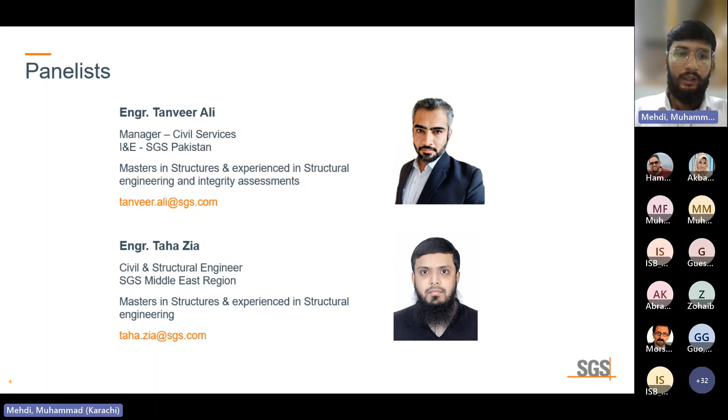In this session, I have the panelists: my senior and manager from civil services, Mr. Tanveer Ali, who is also a civil engineer with a master's in structures. Then we have Taha Zia, again a civil and structural engineer serving the Middle East team for SGS, and he also has a master's in structures.

This is the detail of the program. We'll give a basic introduction about SGS, then the asset integrity management system and its components. We'll discuss risk, risk management and its principles, the significance of risk-based inspection, and the criticality and potential risk for civil structures. We'll discuss the procedures involved in RBI, some examples of RBI inspections we have done, and inspection strategies related to RBI. Then we will have a question and answer session.

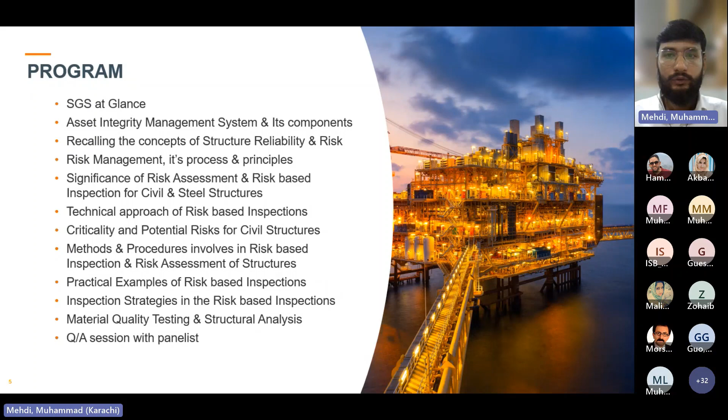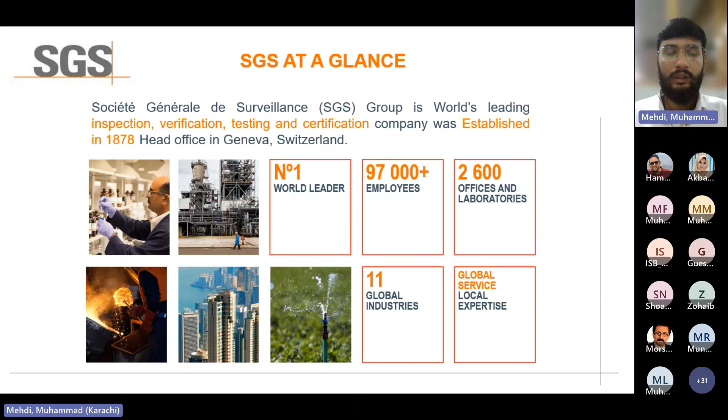Starting with SGS: it is a group and a world-leading inspection, verification, testing, and certification company, known as Société Générale de Surveillance. It was established in 1878 and currently serves more than 160 countries. On the timeline, SGS was founded in France in 1878. Then the business took off, and we opened new offices in France and different ports in 1879. In 1915, the headquarters moved from Paris to Geneva, Switzerland. In 1919, the name Société Générale de Surveillance was given.

In 1955, we started inspecting industrial machines and related goods services. In 1962, we established services for oil and gas, chemical sectors, mineral industries, and government institutions. In the 70s, we started providing environmental consultancy and remediation services. In 1981, we increased our presence in different areas, and our sales also increased. In 91, the booming economies in Asia fueled our growth, and we expanded our business to China as well. In 2000, our business grew further, our structure was enhanced, and SGS came to a leading position in the inspection business.

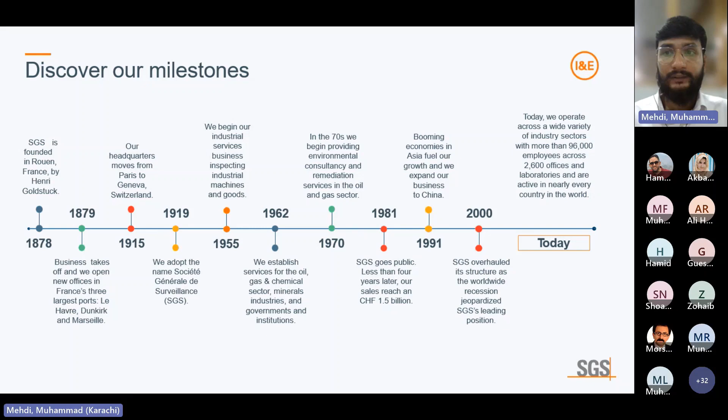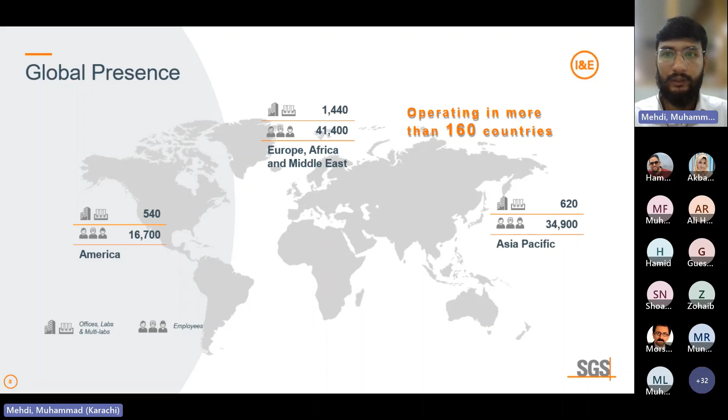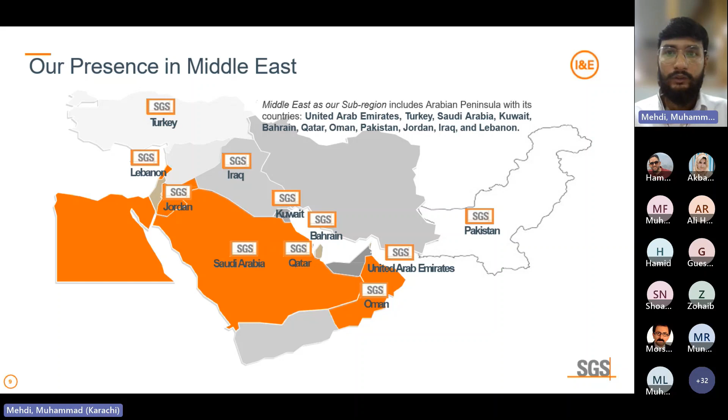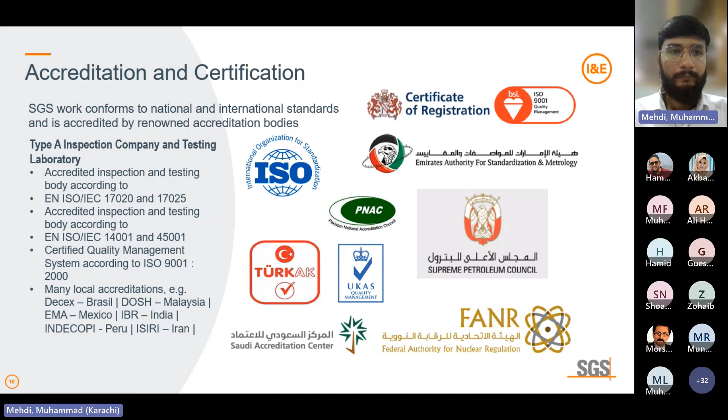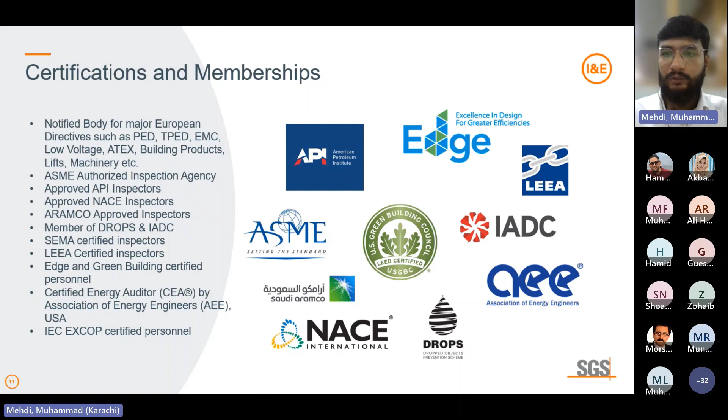Similarly, we have memberships and certifications, and we are approved inspectors for API and NACE. Also, we have approvals from Aramco, and we have certifications from the green building associations, things like these. So this was a brief introduction about SGS.

Now coming back to our topic, it is related to aging facilities and the risk-based inspection approach for civil and steel structures. So we will go step by step, and we will start from the bigger picture and then zoom into risk-based inspections. So we'll discuss first the asset integrity management system.

Asset integrity management system is basically a kind of program, and if we talk about it particularly for civil and steel structures, it is a framework which ensures the reliability of the structures, the safety of the structures, and the availability of the structures throughout the entire life cycle. It identifies and assesses the safety, environmental and financial risks which can be associated with the operation of the structure. It also establishes and maintains the suitable risk, and with the help of this program, we can further reduce the possible risk to our structures and assets.

The design we produce during our structural engineering and during the entire phase of engineering, it also assures that the design is fit for purpose, engineered to approved standards and in compliance with international standards. It reduces the risk to persons and the environment, as well as financial risk and the reputation of the company. So these are some of the risks, and with the help of this program, we can reduce them.

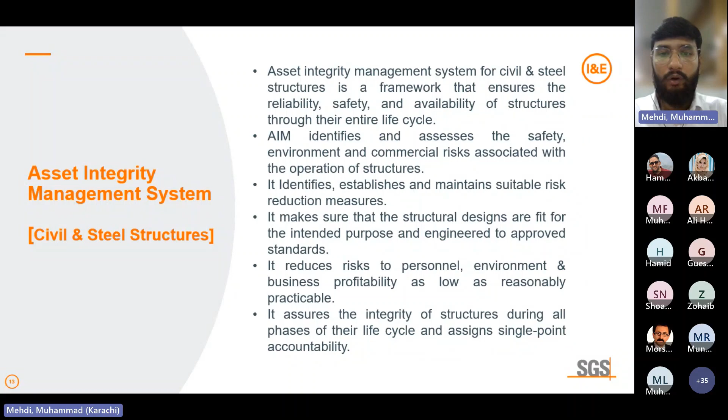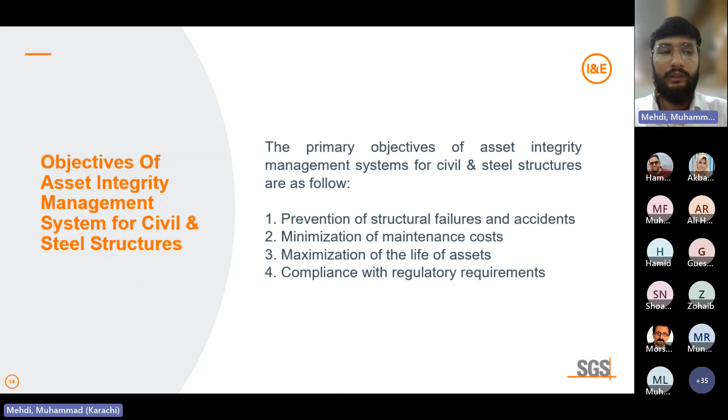It also assures the overall integrity of the structure during all the phases of their life cycle, and assigns the responsibilities to someone. So if we talk about the objective, it is to prevent the structure from failures and possible accidents. It can minimize the maintenance cost of the structures. With the help of an asset management system, if it is designed and developed efficiently, it can maximize the life of the asset, and it can also show compliance with the regulatory requirements, codes and standards.

So let's talk about the components of the asset integrity management system. They are five in number: first we have risk assessment, then we have inspection and maintenance, and documentation, then we have change management, and performance monitoring. We will discuss them one by one very briefly.

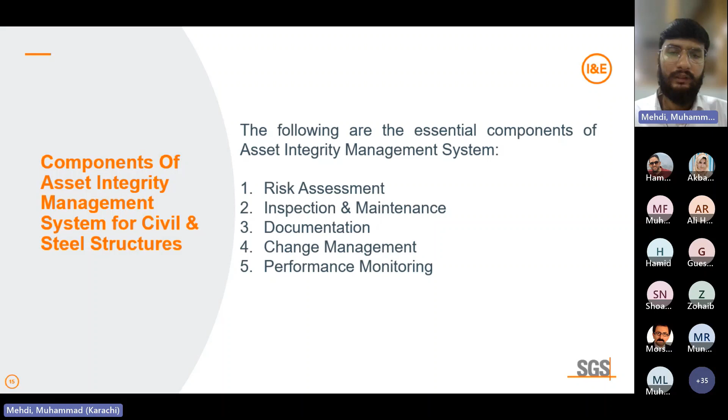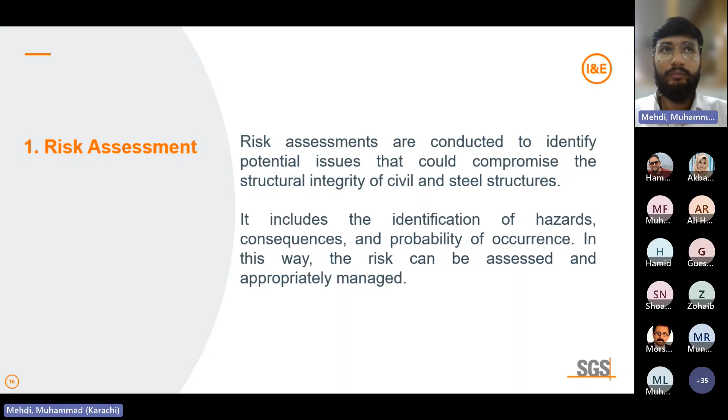Risk assessment is the kind of activity and phase which we conduct to identify the potential issues that could compromise the structural integrity of the civil and steel structures. It can be from various factors. It also includes the identification of potential hazards, the likelihoods of these hazards and the consequences. And in this way, the risk can be assessed, and if the risk is identified properly, we can manage it efficiently. So we perform the risk assessment to identify all these risks and then efficiently manage them.

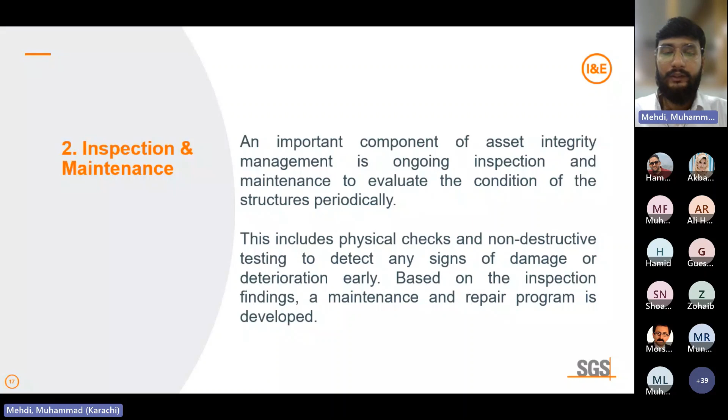The second component is inspection and maintenance, and it deals with the inspection of concrete structures and steel structures, which can be bridges, buildings, or oil and gas structures like foundations of the equipment. Once we perform the inspection, on the basis of that inspection and the observations, we develop strategies to maintain and repair the structure and to increase their life. The inspections include physical checks and non-destructive testing to detect any kind of damage and deterioration. And definitely we will develop the repair programs on the basis of these observations.

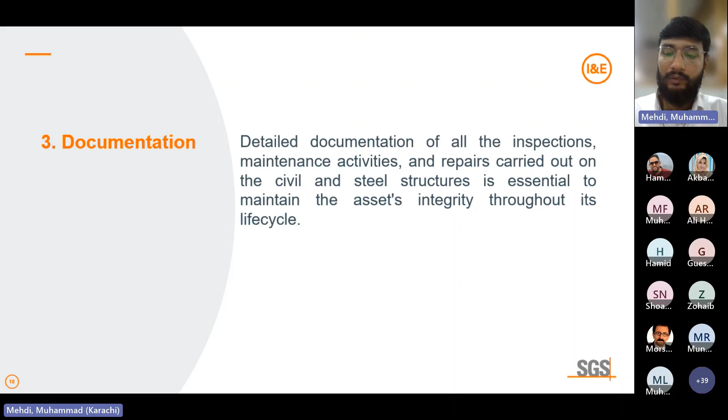So once we perform the inspections, we usually note down the observations we take during the inspections and maintenance activities, and then repair is carried out on the civil and steel structure in the areas of weakness, whatever damage the steel structure or concrete structure has. If it is possible to develop a kind of repair strategy which can enhance the life of the structure, we can develop certain types of repair strategies. And if it is not possible to further enhance the life of the material, then other options are to change the use of the structure or demolish it.

So this is the point I'm discussing, the fourth component, in which it is important to manage the changes to the structure, including modifications, refurbishments, reconstruction and demolition activities. These are all decisions taken on the basis of the last three components, which are inspections, risk assessments and documentation.

The purpose is that the changes do not compromise the asset integrity. For example, if a building is designed for a certain load, and solar panels are added on the roof, the building needs to be checked and assessed before the increment in the load. If it is not assessed and the integrity assessment of the structure is not performed, then there is a possible

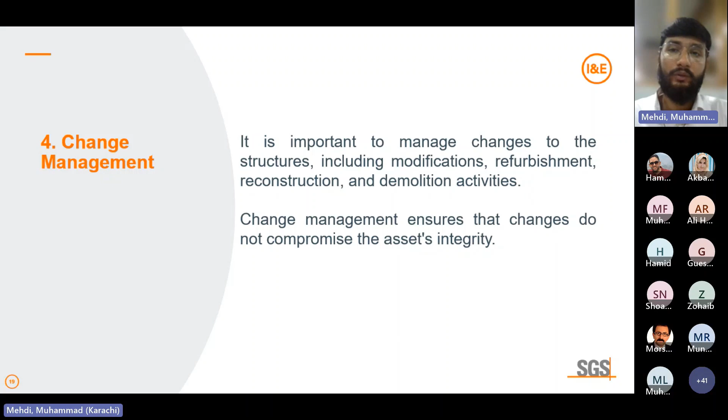This is the fifth component, which is to optimize the asset performance. It is critical to implement performance indicators and monitor the system. This component basically helps to provide data in the decision-making process and identify any trend that could lead to failure. So in this stage, we develop certain types of indicators which help us to assess the condition of our asset, which in our case is civil and steel structure.

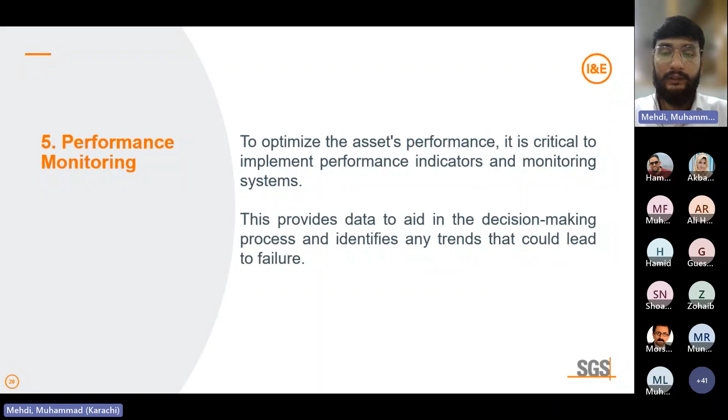So if there is a trend in which the damages are developing and cracks are emerging, then we can note it down, and our inspectors, on the basis of their periodic inspections, can share the document which helps us, or the owners, to take the decision for the

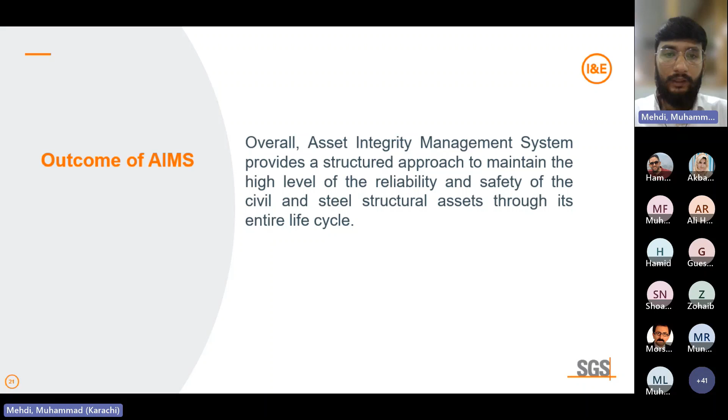changes. So overall, the asset integrity management system provides a structured approach to maintain a high level of reliability and safety of the civil and steel structure assets over its entire life cycle, and this is the goal of the overall asset integrity management system.

So before moving towards the detailed discussion on risk assessment, I just want to recall the concept of reliability, which is about applying engineering theories to buildings and more generally structural analysis. Reliability is also used as a probabilistic measure of structural safety. The reliability of the structure can be defined as the complement of the probability of failure.

So we have the probability of failure, which is dependent on the different types of failure modes and potential failures, which can be structural redundancies, a design problem, construction errors, the number of inspections done, or natural disasters

or fireworks, things like these. So whatever the potential failure, we can develop equations and on that basis calculate the probability of failure, and the reliability can be calculated as the complement of the failure. Failure usually occurs when the stress exceeds the strength. So reliability is measured by comparing a component's stress to its strength. The larger the gap between stress and strength, the greater the reliability and the safer the structure.

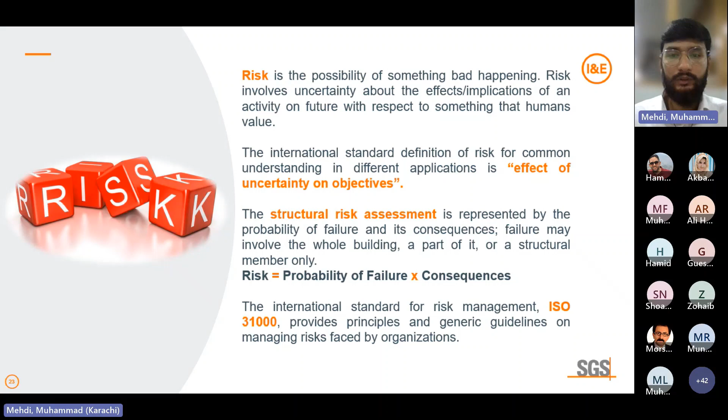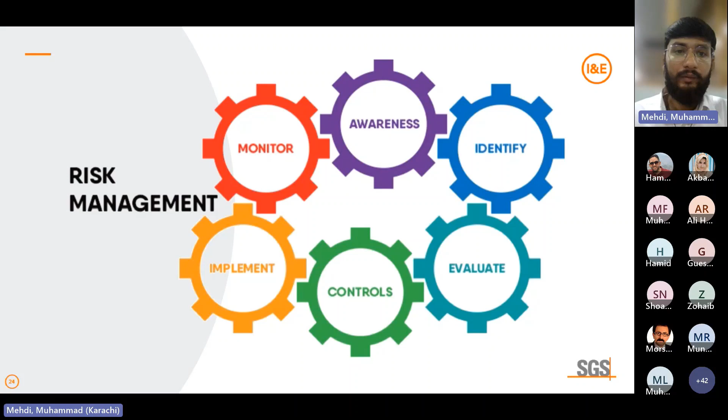The standard we use for risk management is ISO 31000, which provides the principles and guidelines. Risk management has different parameters and components in which we identify, evaluate, and control. We create awareness, we monitor, and then implement them.

So if we talk about risk management, it is the process of identifying, assessing and controlling the threats to any organization, the threats to any asset, for example, machines like equipment, electrical assets, mechanical assets, and in the civil category, the threat to any structure.

These risks stem from a variety of sources, including financial uncertainties, legal liabilities, technology issues, strategic management errors, and can be due to accidents and natural disasters. We will discuss them in detail in the upcoming slides. And these risks can affect the people, the finance, the environment, and the reputation of the organization.

The process involved in risk management has planning, identification, quantitative and qualitative analysis, response planning, monitoring, and control of the risk. As I discussed, the objective of risk management is to increase the probability and impact of positive events and decrease the probability and impact of negative events in the overall asset life cycle.

So in case of civil and steel structures, if we want to reduce, minimize and manage the risk, then our target is to improve the condition of the civil structures or steel structures by proper maintenance. And if this is done properly and from time to time on the basis of proactive maintenance, the structure can improve its life.

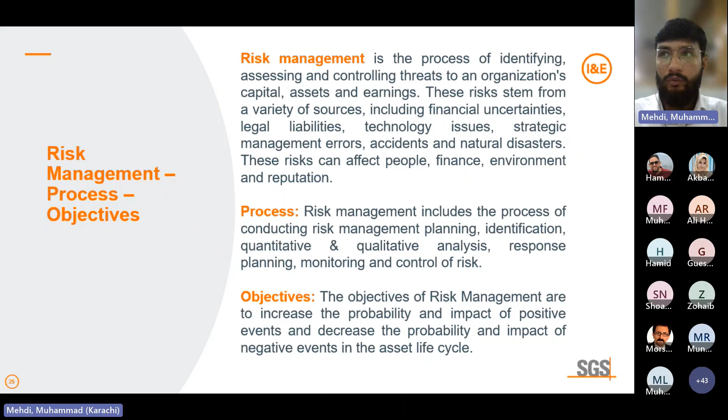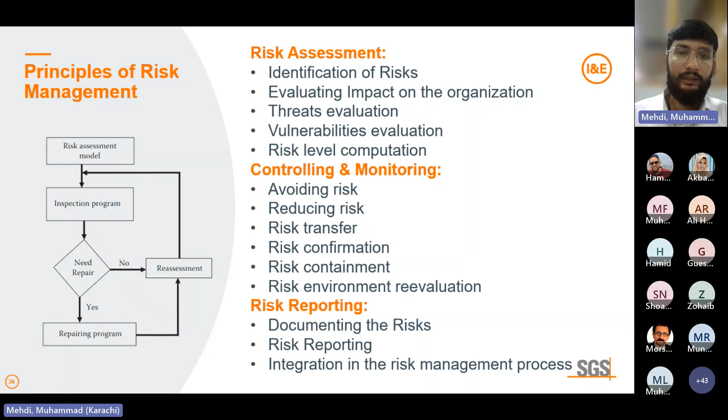So till now, whatever we have discussed is a kind of basis, in which I have recalled the concepts related to risk, reliability, the risk management program, and overall, in a big picture, the asset integrity management system. Now we are going to talk about the risk-based inspection approach for civil and steel structures.

So RBI, in short, is a systematic approach which is used to assess the likelihood and consequences of equipment or structural failure. If applied, we can manage the risk associated with civil and steel structures, and it involves a combination of statistical analysis and structural engineering expertise, including structural analysis. It involves understanding the mechanical and chemical properties of the material, and it also involves site-specific factors related to the construction.

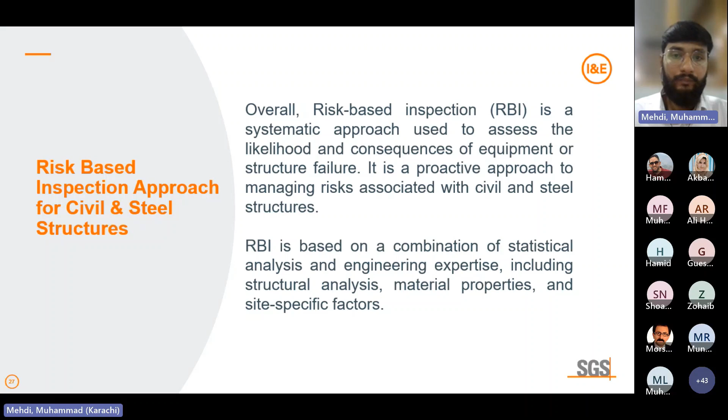So in case of civil and steel structures, RBI can be used to identify potential vulnerabilities which can be due to inadequate structural design, for example, the load taken for the design may not be suitable, and the building is designed for less load. Another factor is the environmental factor, and the third one is construction issues.

So these are some potential vulnerabilities, and with the help of RBI, we can identify the problems related to material degradation, cracks emerging in concrete structures and steel members due to extra loading or some kind of unplanned loads, and corrosion and fatigue in these structures.

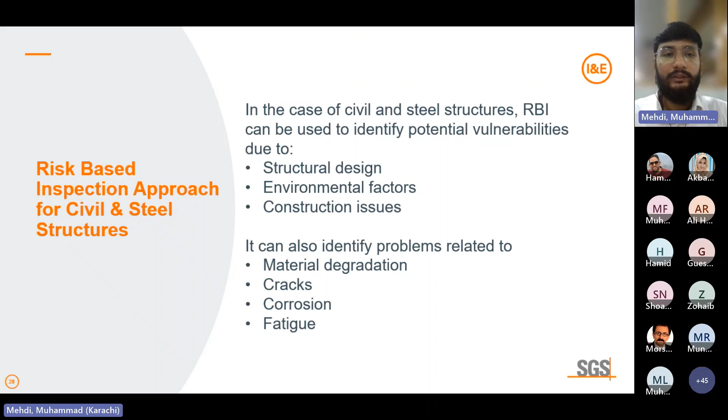And similarly, for example, the flood conditions, like in Pakistan last year, the rainfall was very high, due to which flood conditions developed in various regions. So it affects the substructure of the building, and if it is not properly addressed, we can lose the lives of people. We can have financial losses. We may have environmental issues, and also it affects the reputation of the organizations who are designing the buildings, who are

constructing the buildings. And in fact, if we talk about the industrial sector, for example, if you have a tank and it has a ring wall in the bottom, if the ring wall is not designed adequately to cater the load of the tank, if it is not properly monitored and maintained, then the degradation, the deterioration of the structure, and if corrosion emerges, it can affect the integrity of the structure, and ultimately it can cause a serious problem for the integrity of the tanks. And settlement issues arise, due to which there may be leakages of the oil, which can contaminate the soil at the bottom and will affect the environment.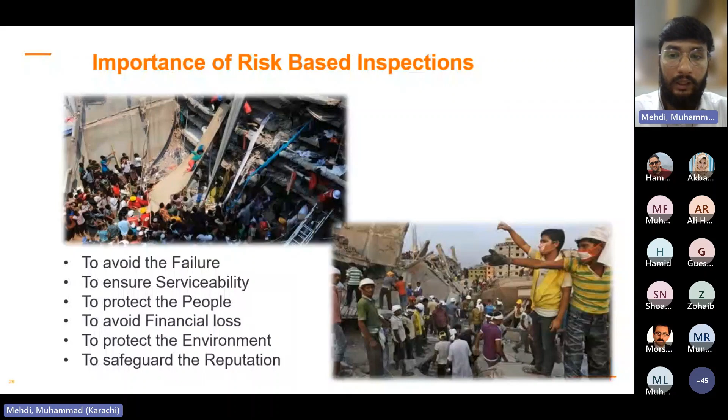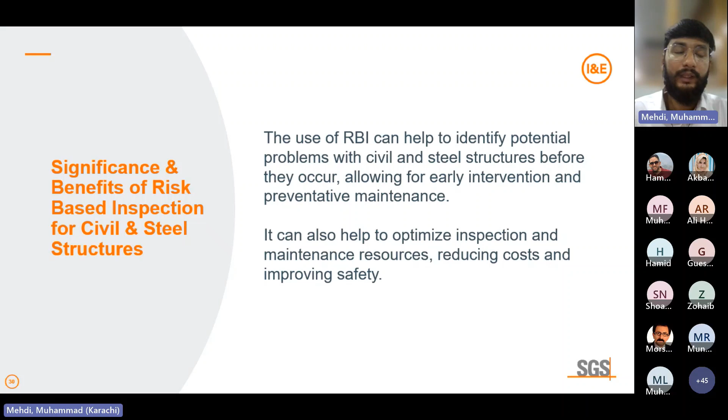So these are some of the issues, and this is the importance of the risk-based inspection, that if you perform the inspections timely, then we can protect many lives and assets. So the target is to identify the potential problems before they occur, allowing for early interventions, and we can develop a program for the prevention of these kinds of risks and threats. It can also help to optimize the inspection and maintenance resources, which will ultimately reduce the cost and improve the safety of the assets.

So if we relate the risk-based inspection approach to the maintenance plan, we have different techniques which can be used to define the inspection and maintenance plan for onshore and offshore structures. For example, with RBI, if we understand the whole structure and we know the whole lifetime of the structure, it is easy to predict the future requirements in the maintenance. Similarly, maintenance of existing old buildings and its relation with the cost of repair need to be considered during the maintenance plans, and the lifetime of the maintenance or the protection of the structure must be taken into consideration. So the required time to perform the maintenance must be discussed thoroughly.

We can say that to maintain existing old buildings and restore the structure to its original strength, the repair method of rehabilitation is also governed by the initial cost of the repair, the number of times the maintenance will be performed, and its cost over the remaining life of the structure. Usually, the lifetime of the maintenance or the protection of the structure must be taken into consideration. So the required time to perform the maintenance must be discussed thoroughly. And the first step usually is to calculate this particular time, when maintenance needs to be performed.

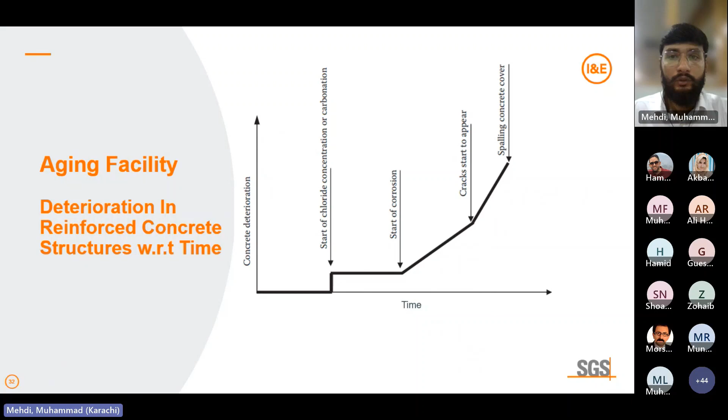Similarly, if you talk about the reinforcement, usually without corrosion, the rebars have minimum nominal diameter. But when corrosion starts and the degradation process begins, then material degradation due to moisture or oxidation causes the material to disintegrate, resulting in capacity loss in the reinforced concrete sections.

If we talk about the fundamentals of design of any reinforced concrete member, the member's capacity is dependent on the cross-sectional dimensions of the concrete and steel area, and the material strength, concrete strength, and steel yielding strength.

In the case of uniform corrosion, as you can see in these figures, the total longitudinal reinforcement area can be expressed as a function of time, where T is the time, D is the diameter of the bar, N is the number of bars, Ti is the time corrosion initiated, and Cr is the rate of corrosion. Equation 11.2, as mentioned here, takes into account the uniform corrosion propagation process from all sides.

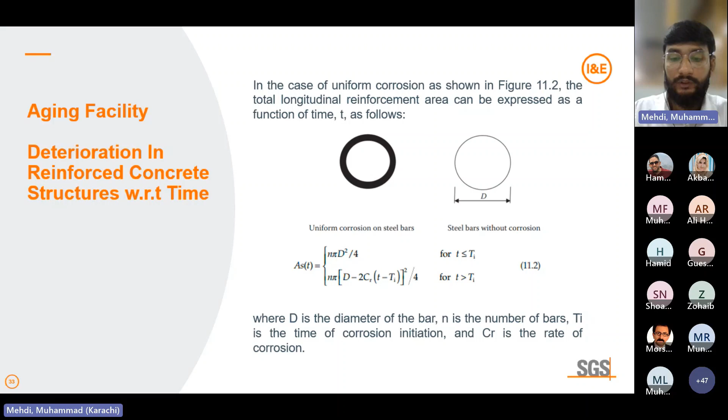Overall, over time, the collapse of the structure is more likely with the increase in the rate of corrosion. In these curves, you can see we highlighted the pattern of deterioration of the steel reinforcement.

In these two slides, slide 34 and slide 35, this slide particularly shows the reinforcement ratio—at the bottom we have 1% ratio. We are talking about this particular structural element, the column. In the column, we have a range from 1% to 8%, but usually it is taken from 1% to 4%. If there is a lower reinforcement ratio, which is 1%, the reliability versus time graph shows different corrosion rates.

For example, the minimum rate is 0.064 millimeter per year, and the maximum is 0.114 millimeter per year. In this graph, from 0 to 10 years, the pattern shows a reliability value of 4 to 5, then from 10 to 20 years it reduces, and from 20 to 50 years it's moving constantly.

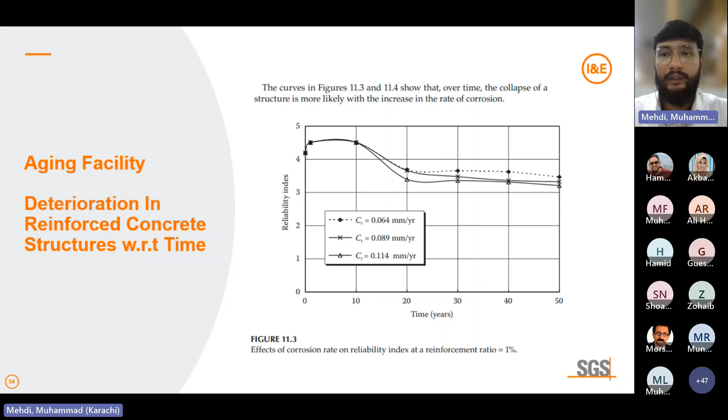But in the next slide, if the reinforcement ratio is increased to 4%, then from 0 to 10 years, the value of reliability is again more than 4, in fact more than 5, meaning the reliability is improved. But when it moves from 10 to 20 years, it reduces, and after 20 to 50 years it reduces gradually, and it is not a constant curve.

In these cases we understand that in case of higher steel ratios and lower corrosion rates, this period may increase to about 15 to 20 years. Moreover, this study expects that in case of columns with eccentricity, the moments on the column will increase, so the design should increase the percentage of steel. In such cases, it is expected that the deterioration of a structure towards criticality will occur after a couple of years in cases of lower reinforcement steel ratio and very high corrosion rate.

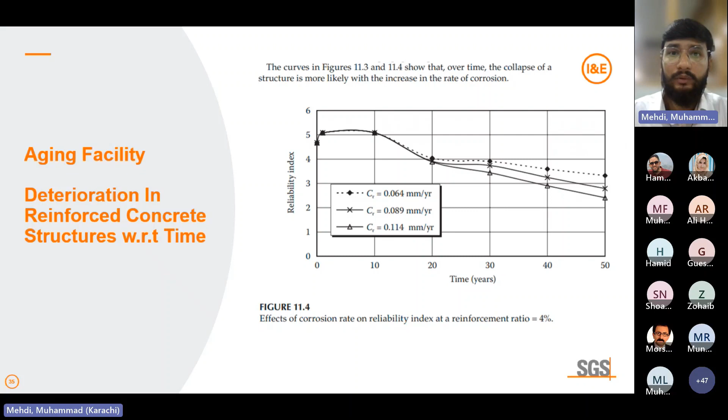On the other hand, as in this graph, in the case of higher reinforcement ratio and lower corrosion rate, maintenance will be due somewhere around after 5 to 10 years. So this is what we wanted to explain, that over time the collapse of a structure is more likely with the increase in the rate of corrosion. These need to be considered when highlighting the risk.

So in this section, we can see this is a calculation for the time which is required for the corrosion. In the case of structures exposed to chloride, the time required for spread of chloride in the concrete until it reaches the steel is the time required for the corrosion.

It is also important to consider that in the case of structure exposed to carbonation spread inside the concrete cover, several equations can be used to calculate the time required for this.

To calculate the depth of carbonation, the equation D equals A into T power negative 0.5 can be used, where A is a fixed amount depending on the permeability of the concrete as well as the quantity of carbon dioxide in the atmosphere, and there are several other factors.

Similarly, in the second equation, we have water cement ratio W upon C, where S is the effect of the cement type, and capital W is the weather effect.

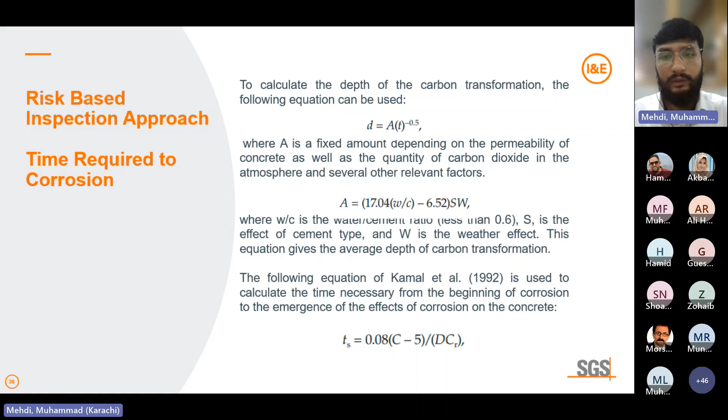If you want to reduce the cost of deterioration, or in other words, optimize the life cycle cost of the structure, a balance needs to be achieved between the benefit of risk reduction by improving designs and maintenance, including inspections, and the cost associated with these measures. If we talk about the failures and the risk cost...

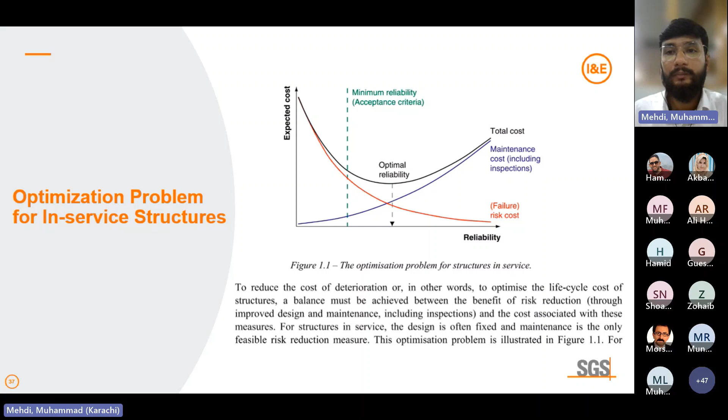Now we're going to talk about the process of risk-based inspection for civil and steel structures.

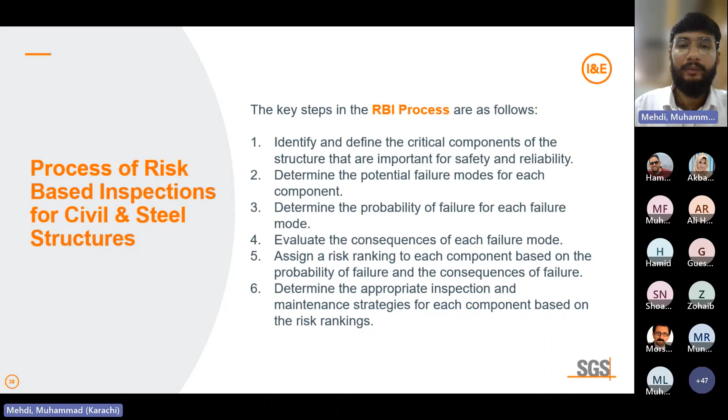It involves identifying and defining the critical components of the structure that are important for safety and reliability. Second, determine the potential failure mode for each component. Third, determine the probability of failure for each failure mode, and then evaluate the consequences of each failure mode. Fifth, assign a risk ranking to each component based on the probability of failure and the consequences. Sixth, determine the appropriate inspection and maintenance strategy for each component based on the risk ranking.

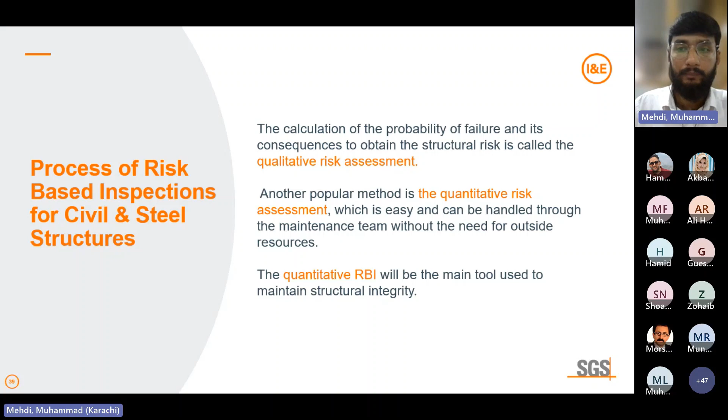So we quickly move on. The calculation of the probability of failure and its consequences to obtain the structural risk is usually called qualitative risk assessment, but we can also perform a quantitative risk assessment in which we calculate numbers, and on the basis of these numbers we can develop risk matrices.

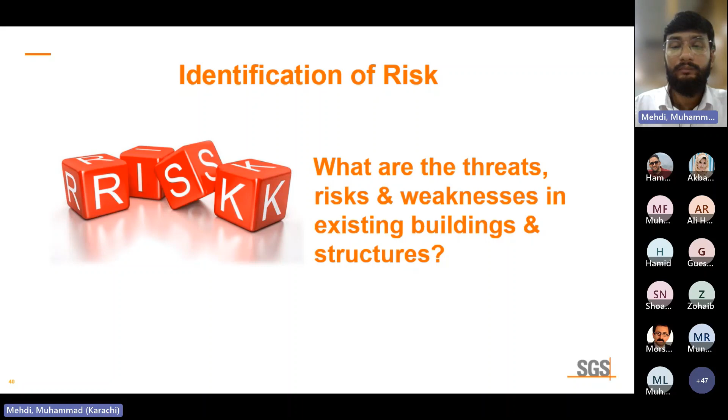So one by one we will discuss these processes involved. In the identification of the risk, we need to identify what are the risk threats and weaknesses in the existing building structures. From design to execution, you need to think and plan.

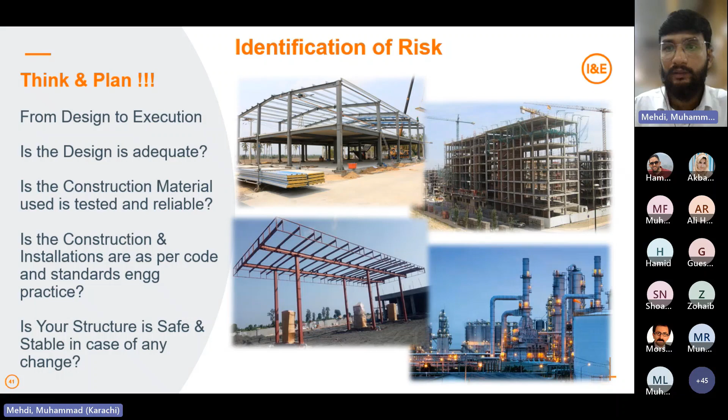Is the design adequate, is the construction material used tested and reliable, are the construction installations as per code and standard engineering practices, is the structure safe and stable in case of any changes. These are some pictures related to pre-engineered buildings, civil concrete structures, high-rise buildings, industrial plants, and fuel utility stations.

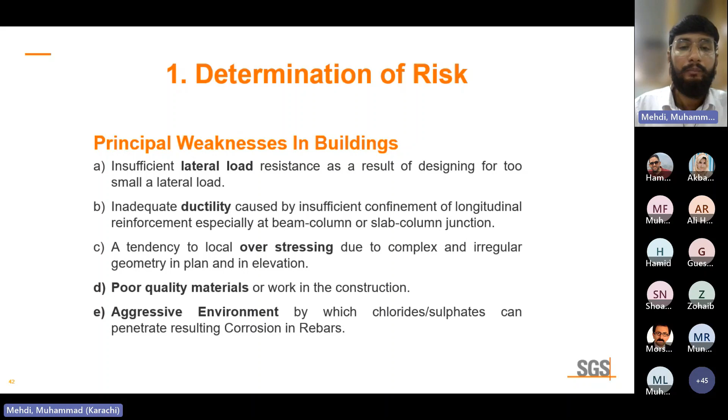It can be a tendency to local overstressing due to complex and irregular geometry in plans and elevations, poor quality material in the construction work, and one factor is aggressive environment due to chlorides and sulfates penetrating and resulting in corrosion of the rebar.

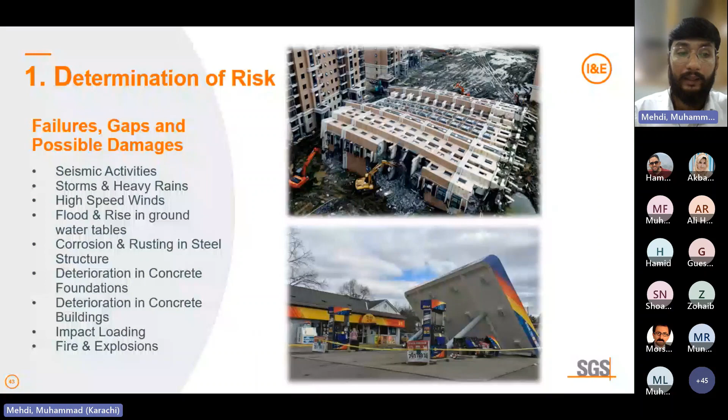You can see the collapse of these buildings and fuel retail stations. This happens because if buildings are not designed adequately or not constructed properly, they can be affected by the impact of loads, seismic activities, effect of storms and heavy rains, high speed winds, flood and rise in groundwater table, corrosion and rusting in steel structures, deterioration in concrete foundations, deterioration in the building, and impact loading when heavy force in a short span of time affects the structure.

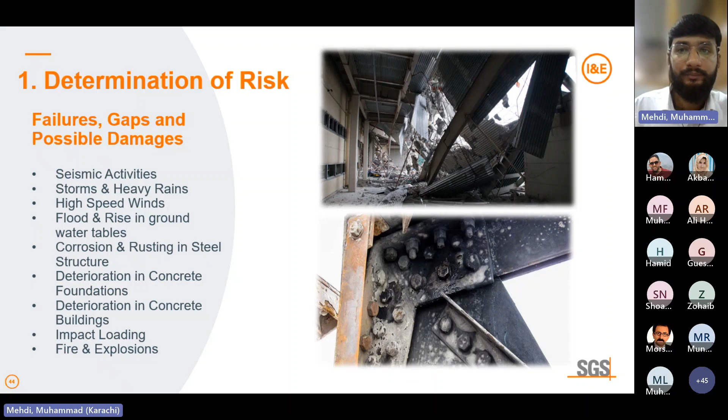It can collapse the structure, and fire and explosions in the industrial sector is very common. You can see the impact of fire in steel structures as well when structures are not properly constructed. Fireproofing can perform here to minimize the risk of fire, but as you see, it was not done, so that's the impact of the burning, and the effect of load, impact load, as well as the effect of wind loads can be very common in steel structures if they are not designed adequately.

Similarly, the effect of earthquakes and seismic activities for the oil and gas sectors, especially for offshore structures, the structures under the sea, is very important to be monitored periodically to avoid corrosion, the start of corrosion, and the CP system to control corrosion needs to be monitored especially.

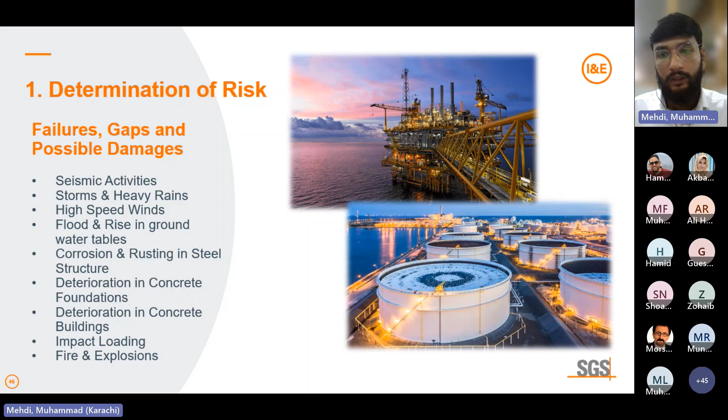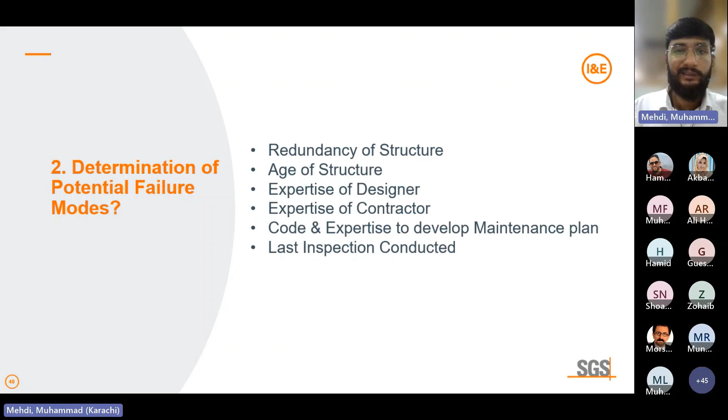Second is determination of the potential failure modes. It can be redundancy of the structure, age of the structure, expertise of the designer, expertise of the contractor, code and expertise to develop a maintenance plan, and the last inspection conducted. These are some potential failure modes which can be considered to determine the probability of failure.

Determination of the probability or likelihood of the failure modes can be calculated by these tables. You can see that whenever a structure is constructed, after 10 years there is a probability of failure of 9%. After 20 years, it increases to 25%. And with the passage of time, after 50 years, there is a 91% probability of failure because the material usually degrades.

And if the maintenance is not properly managed, then there is the chance of failure in the structure. In the second table, you can see the different failure modes, and there are some ranges in which you can quantify them, the level of the risk associated with them. When you quantify them on the basis of expertise and engineering judgments, these S1 to S6 are different kinds of structure taken as an example, and the factors for the structure's probability of failure are assigned accordingly, and then the total score is calculated structure-wise.

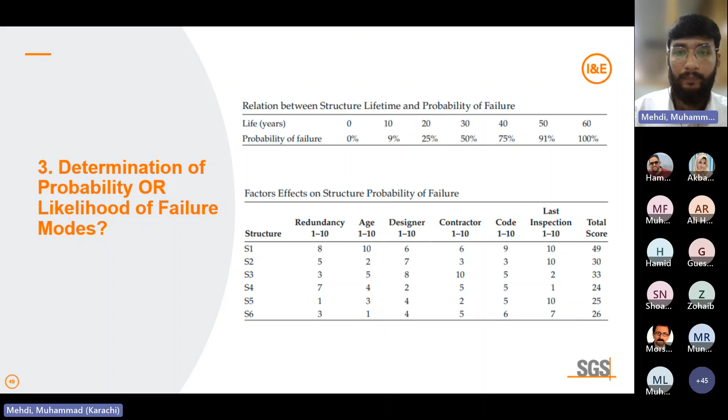Then, in order to calculate the consequence of failure, six different structures are taken as an example. The impact on the person, impact on the cost, impact on the environment, and impact on the reputation. These are again numbered in ranges from 1 to 10, and these are assigned as per expertise: what the consequences are, how much the person will be affected, how much cost it will be when this particular structure is damaged.

For example, if the ring wall foundation of the tank is damaged, it will definitely affect the whole tank full of crude oil or other material. Similarly, if the foundation of a high-rise building is affected, or if the pile of the offshore structure is affected, then it will definitely cause harm. But, for example, if the cantilever slab of any projection is affected, then it will have less impact on the environment, or minimum cost will be taken to reconstruct it. So these are some factors which are considered during the calculation of the consequences.

Then we have an evaluation of the risk ranking based on the probability and consequences. Again, remember that when you are calculating the risk, it is the product of the probability and consequences. So for all the structures, the probability of failure was calculated from the last table, and the consequences are calculated from this table, and they are placed here in two different columns. Then by the product of the probability of failure and consequences, we get the risk number. These numbers are very important because on the basis of them, we can categorize them priority-wise.

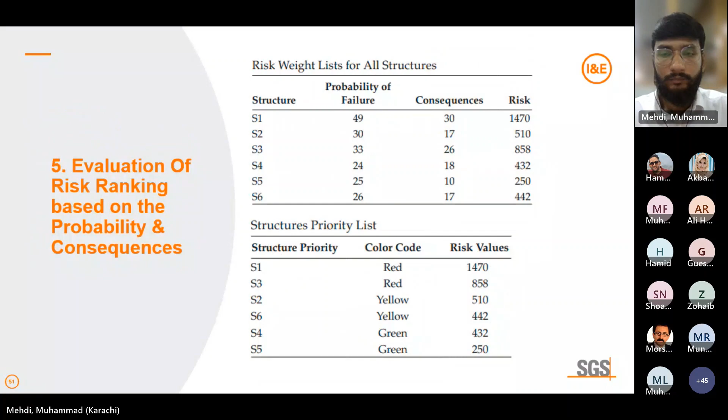And priority means we can give high importance to that particular structure which is in the red category, then the yellow category, and least importance is given to the green category. Step by step, you perform the maintenance, and repair strategies are developed accordingly. So you can see here, this is a kind of example. Okay.

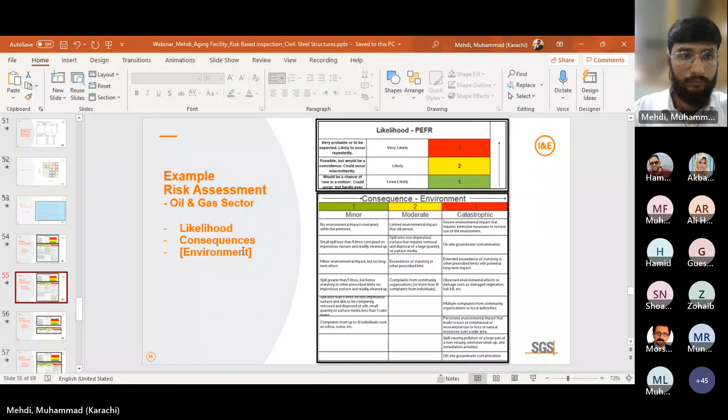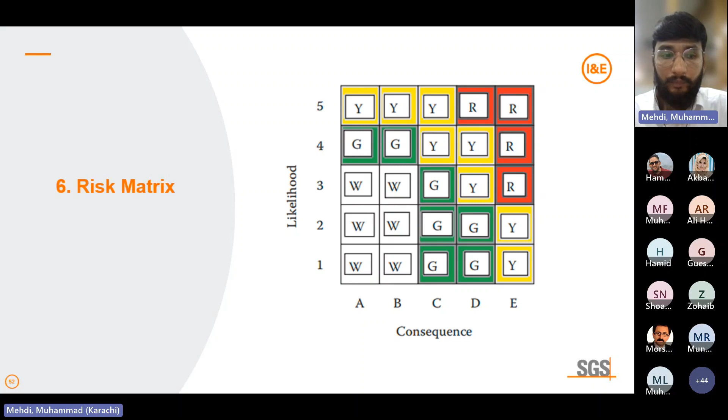So after these calculations, you can develop a kind of risk matrix in which on the bottom you have consequences, and on the vertical axis you have likelihood or probability of failure. So you will then categorize them and can also assign them a particular color on the basis of the priority. So I'm sharing one example here from the oil and gas sector, in which

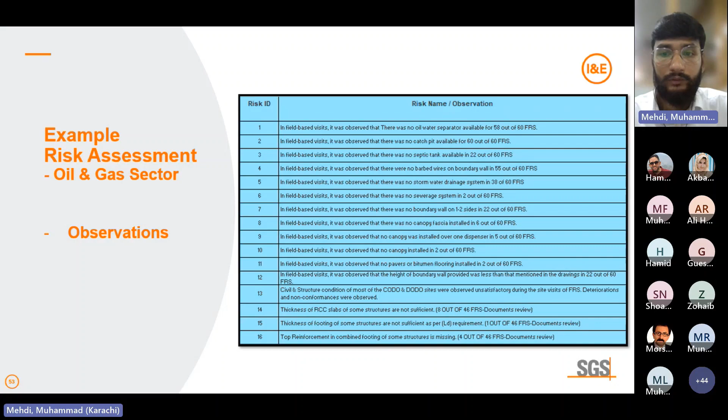we have taken some observations for the fuel retail stations, and you can see that there are a number of observations related to the unavailability of, for example, the oily water separator, the unavailability of the catch pits, boundary wall is not available in some cases, canopy structure was not available, and similarly, the thickness of the RC slab of the structure was not sufficient. So after these observations, each observation was considered, the likelihood was assigned, and the consequences were also assigned.

So the likelihood deals with how likely this can happen. If it can happen repeatedly, then we assign a 3. Similarly, if there is a possibility to occur intermittently, then it is a 2 with the yellow color, and if it is less likely, then it is a 1.

The consequences on the people, you can see here, there were 3 different columns. Minor consequences are when people are affected and there is a requirement of first aid, not affecting work performance and not affecting the daily life activity of a person, and illness with reversible health effects such as food poisoning and dermatitis. So these are some guidelines: if people are affected in this category, then it is minor and a consequence of one is taken.

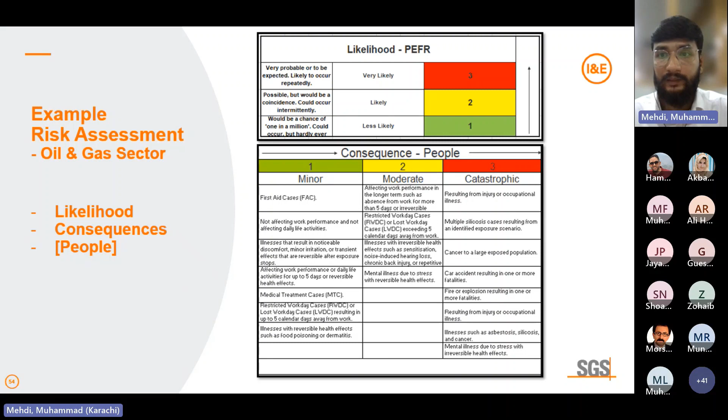Otherwise, if it affects the performance in the longer term, such as absence from work for 5 days, for example, then it is considered moderate. And if it is resulting in injury or occupational illness, or a kind of car accident, or multiple, you can say, for example, cancer to a large exposed population, these are some factors which are considered a catastrophe for the impact on the people.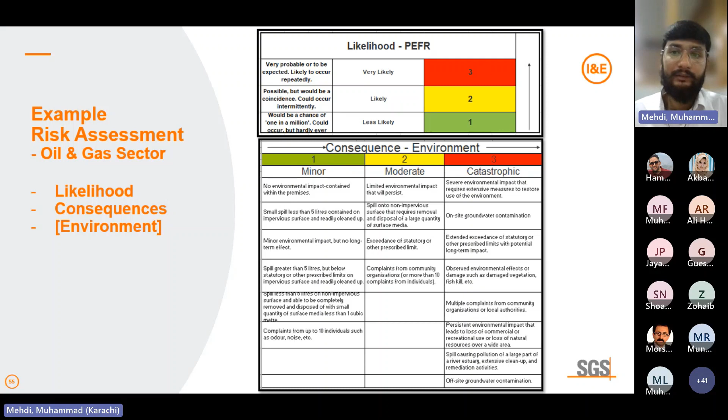In the third consequence, we have finance. For example, a cost up to 100,000 USD can be taken as minor, moderate in between 100,000 to 1 million USD, and a cost exceeding 1 million USD is taken as catastrophic. This is the impact on the finance. It means if your structure is damaged, if your building is damaged, what will be the effect on the finance of the organization? And it is not only limited to the cost of the asset, particularly.

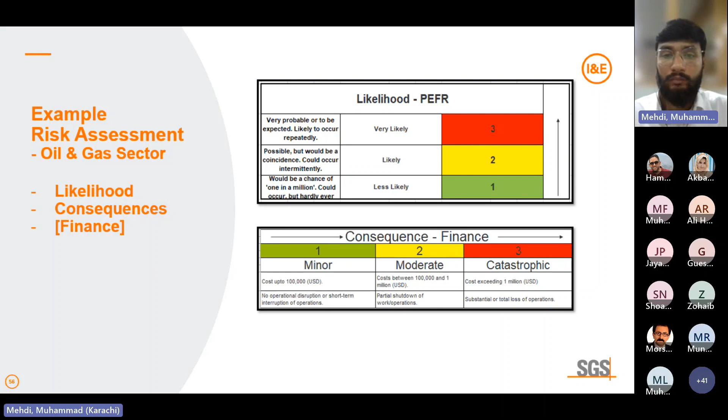For example, you can see if the operation is disrupted, if there is total loss of operation, then it will be considered a catastrophe. But if the operation can be resumed after some days or a short time, then it can be taken as minor. The last is the reputation of the organization.

If the damage of the asset is negligible to notable on local level, no local media coverage, no public awareness or concern, then it can be taken as minor. But if there is extensive coverage in national and international media, for example, there are casualties of people, or there was extensive damage to the infrastructure, then it can be taken as catastrophic, because it will affect the reputation of the organization, or maybe it can cancel the license of the organization if the damage is so high.

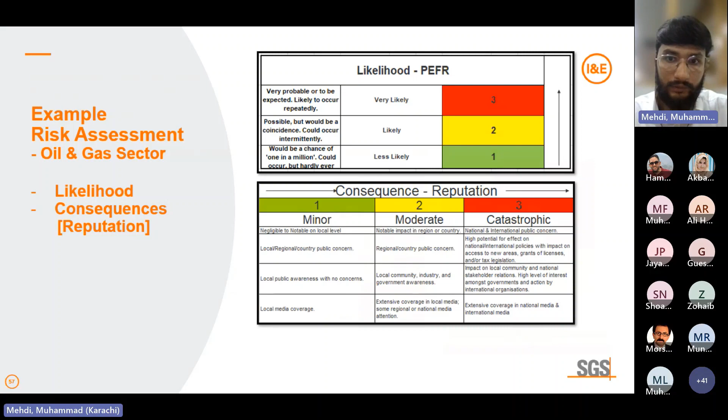So these are the kinds of consequences. On the basis of the last 3 to 4 slides, this is the outcome. On the left side you can see the observations, then there is a likelihood column, then we have consequences on the people, environment, finance, and reputation. And there is a risk score, which shows the color of the risk and also a number giving the priority. For example, red color shows that priority is given to these particular observations on an immediate basis, and the repair and maintenance strategies should be developed.

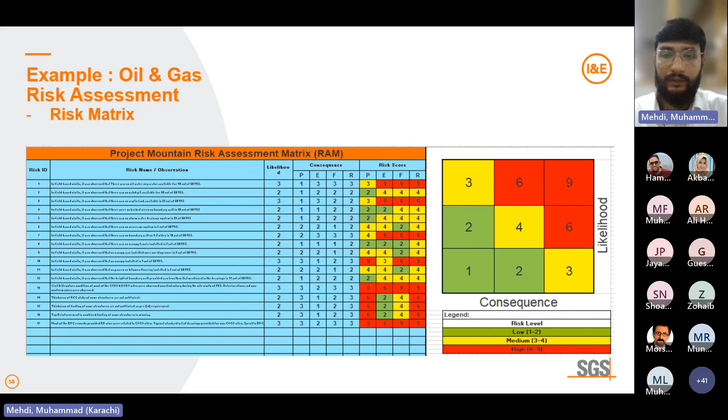So after this risk matrix, we have 3 to 4 slides remaining, in which we will be discussing the inspection and maintenance strategies. The decision-making methods of an engineering project have been the focus of numerous studies in terms of their economic and financial importance to the cost of the project, because any wrong decision or false assumption could result in spending a huge amount of money to reverse the consequence and effect of this damage.

So some studies have used decision trees to determine the appropriate time for repair, particularly in the case of infrastructure bridges, which required periodic inspections. When performing the maintenance plan strategy based on cost, we must consider all the factors affecting corrosion in general, and other factors affecting structural durability and reliability. For example, any method upon which a decision is based should define the time for regular maintenance and inspection, such as 10 years, 15 years, or 20 years.

This decision is made first and foremost through the identification of the least expensive option. So this is the main way forward, that the decision is made first and foremost through the identification of the least expensive option.

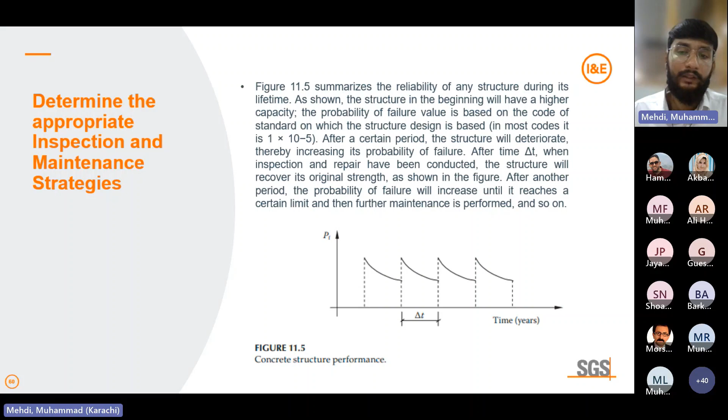So if periodic maintenance inspections and regular repair and maintenance are performed efficiently as per the maintenance plan, and strategies are developed efficiently and implemented effectively, then the reliability of the structure, the civil buildings, or whatever asset you have will increase throughout its life cycle, and it will give you better options for the rest of the operations.

So similarly, there are some parameters in which you can see that inspection alone cannot improve the reliability. This is another aspect. It is accompanied by a corrective action in the event that a defect is discovered. Several policies and strategies are used widely for structures. They should include monitoring until the crack depth reaches a certain proportion of the material thickness and then repairing them, or immediately repairing upon detection of an indication of damage.

Third is repairing at a fixed time, for example, 1 year after detection of an indication of damage, and repairing as new, for example, repairing the welding in case of a steel structure. These are some criteria for all kinds of corrective actions, but depending upon the level of damage or deterioration you observe in your structure, you can plan the repairing

program accordingly. For example, if there is a large, severe crack and there is a chance of collapse of the structure, then this is highly alarming, so you need to take decisions accordingly. But if there is a moderate crack and you can repair it, then you should apply the repairing strategies in a short span of time. If there are minor cracks, then you can take some time to repair them and consider them less important.

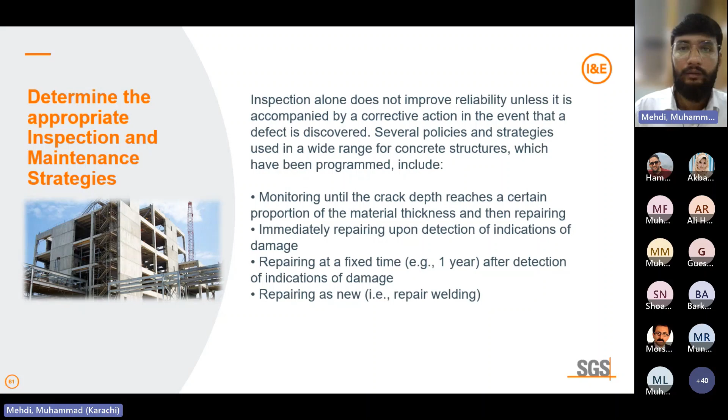Another graph: it is assumed that the inspections are performed at a constant time interval, since inspection authorities often prefer a constant inspection interval to facilitate the planning. From this point, the inspection intervals are chosen so that the expected cost of inspection, repair, and failure is minimized.

For example, some companies decide to perform the inspection every 3 years. This gives them confidence that if there is no unplanned or extra load, and the structure is stable as per the design load, then they can perform the inspection after 3 years and check the reliability and condition of the structure. This will help them minimize the overall cost of failure and damages.

So it is good to develop a program in which you have a specific interval for the inspection of your civil and structural assets like foundations, columns, beams, slabs. For example, you can see in the next slide. Although most concrete structure inspection techniques are visual or involve various kinds of non-destructive techniques, which will be discussed in the upcoming slide,

the ability to detect the damage depends on the quality of the inspection performed. So a qualified inspector is very important: whether he is certified and qualified to perform this inspection, because the lives of people, finance, environment, and the reputation of the organization depend upon the observations he or she takes from the site. So experience is very important.

A higher quality inspection method will provide a more dependable damage assessment, and no repair will be made unless the damage is detected. In the case of other structures such as steel structures, general inspections usually include visual inspection, as well as non-destructive techniques, which may include magnetic particle inspection (MPI), DPT, UT, radiography, and hardness testing.

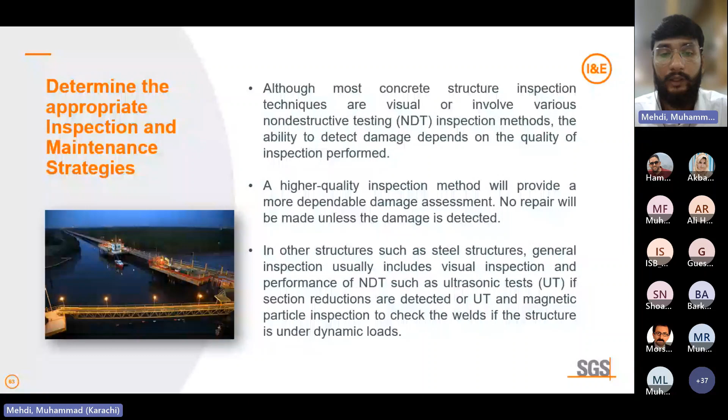And there are some kinds of on-site chemical testing like PMI. So these are some tasks usually performed in the field structures. For the offshore structures, okay.

In case of the offshore structures, we have different rigs for oil and gas, and then we have jetties and trestle bridges. So we usually perform the inspections of these kinds of structures. SGS has expertise in performing the inspections of these structures. These inspections will be performed on the topside, similar to steel structures onshore. But you can see the jacket of the platform must undergo underwater inspection.

And the underwater inspection, which incurs high cost, can be performed by divers, who should be expert in taking observations, pictures and videos, and also by remotely operated vehicles like ROVs. ROVs or divers perform visual inspection to detect the flooded members, define the location of the damaged or bent members. They define the thickness of the marine growth around the piles, and take the cathodic protection readings as well underwater.

So in case of offshore structures, it is very important because the piles are penetrated deeply under the seabed, but the area in between the sea surface and the bed of the sea is highly critical because the effect of corrosion is very high if the CP systems and other remedies are not properly addressed. So appropriate inspection and maintenance strategies need to be defined to inspect them. Whether the boat should be used to check the field condition.

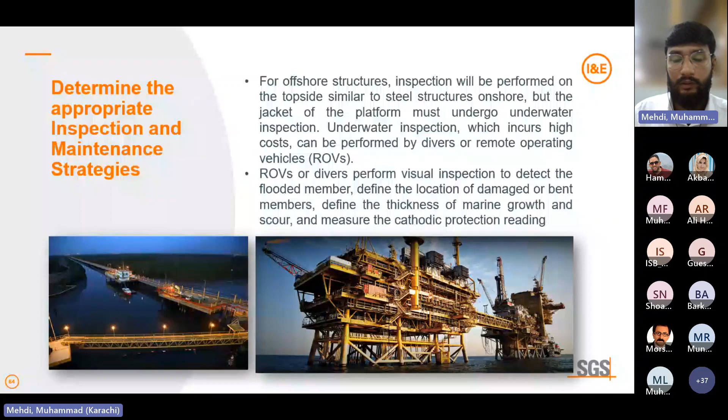There are right now some technologies SGS is using. For example, we are using drones for the inspection of the above-seawater structures right now in Karachi to detect the damages closely. And with the help of the drones, we minimize the risk to our inspectors as well. So this is the way forward with the help of digitalization and innovation. We can use technology to get better results on the damages and possible risks to your structures.

So these are visual inspections performed on the basis of ISO 13822, which gives guidelines about the inspections, and ACI 201.1R for the concrete structures, and American Institute of Steel Construction guidelines. And there are definitely other standards which can be used for the inspection of the structures.

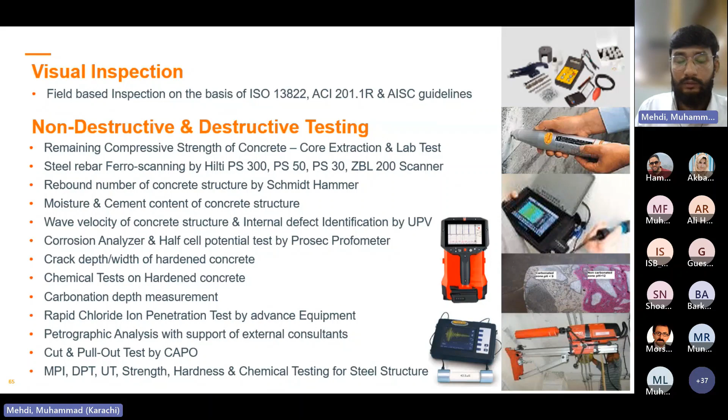The non-destructive and destructive techniques we usually use for concrete structures and steel structures. You can see the list of these techniques, which have ferro scanning, strength, Schmidt hammer testing, the corrosion analyzer. We have chemical testing for the hardened concrete. Then for the steel structures, we can see MPI, DPT, UT, hardness, and chemical testing. These are destructive and non-destructive tests to check the condition and the quality of the material, to further calculate the risk and probability of failure.

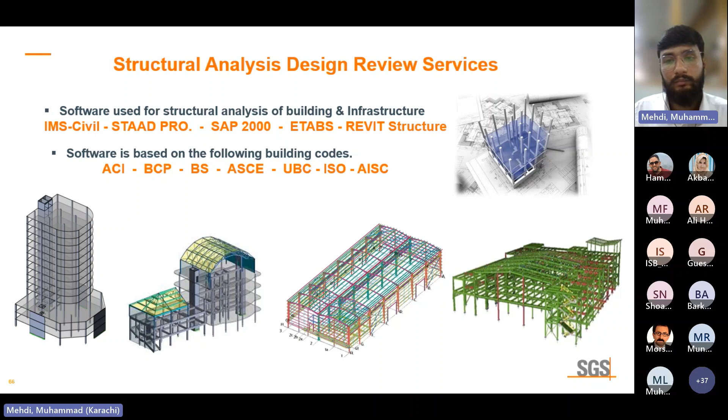So these are the software and the codes and standards which can be used. For example, IMS Civil is used to perform the structural integrity assessment. Then STAAD, SAP 2000, ETABS, and Revit Structure are used to analyze and model steel and concrete structures, to check the behavior of the structure by incorporating the existing condition of the material, and to predict the behavior of a structure on the basis of the load.

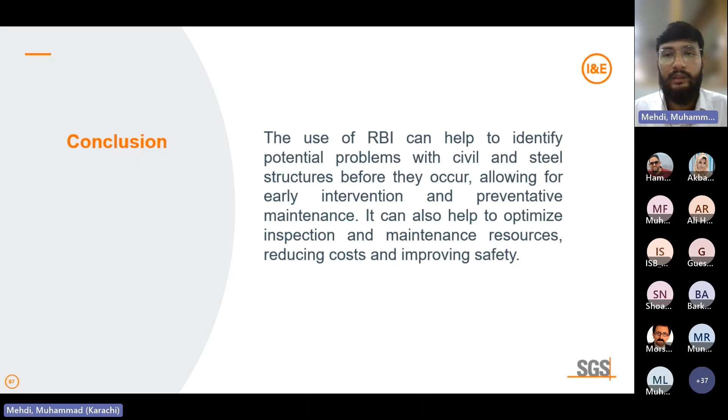So conclusively, we discussed that the risk-based inspection approach will help to identify potential problems with civil and steel structures before they occur, and will allow for early intervention and preventive maintenance. It can also help to optimize inspection and maintenance resources, develop the best strategies for repair and maintenance, and it will definitely reduce cost, optimize these systems, and improve the safety of civil and steel structural assets. So this is all about the risk-based inspection approach.